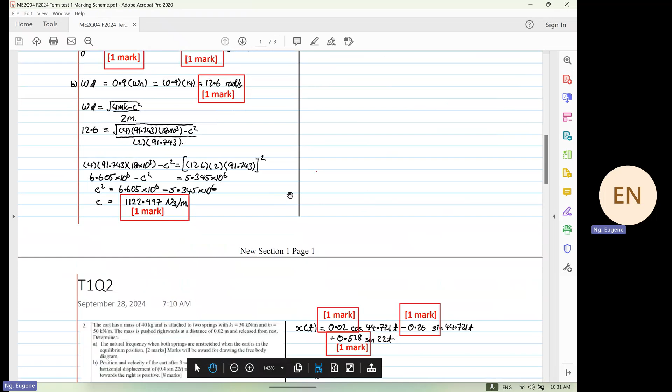So I believe that you have seen the marking scheme. And especially for question number 3, some of you did not calculate two values and the TA did not give you the marks. And I told the TA that as long as your final answer is 2.346, you will get the 2 marks. Are we clear? Okay, so I have a lot of emails coming to me.

Okay, so TAs are very strict. They are not flexible. So most of the time when I see your email coming to me, for question number 3, if your final answer is 2.346, you'll get the full mark. Are we clear? Yes or no? Okay, so don't email me. Email who? Email the TA. And do you know who the TAs are?

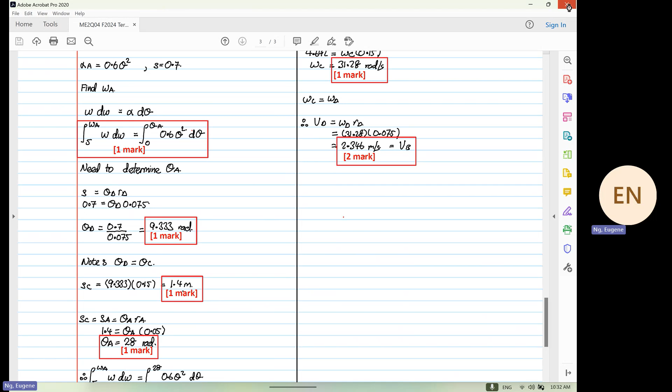Some of you ask me, Eugene, who is my TA? All you need to do is go on to Avenue to Learn, which is on 2Q, and go to the welcome. And on the welcome, these are your TAs. A lot of you know who your TA is, but for some of you that don't, this is how you find your TA. These are the TAs based on your last name. So please contact your TA. If you contact me, I will tell you go to your TA.

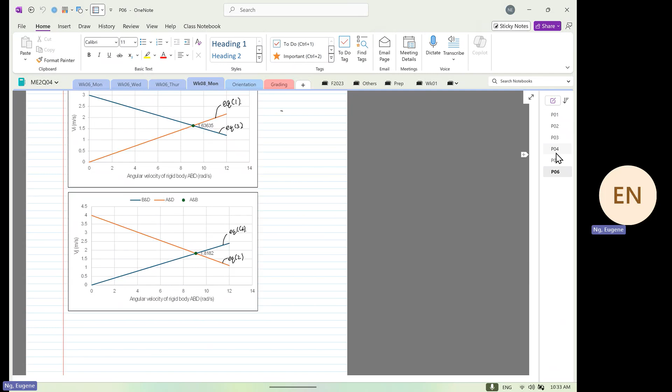Now, I discovered something very interesting, and I think I need to teach this. My colleague in mechanical says no, it's too much for them. I say no, they have to know. So I'm going to look into this problem again. How come I cannot copy the? Bear with me. Let me relaunch.

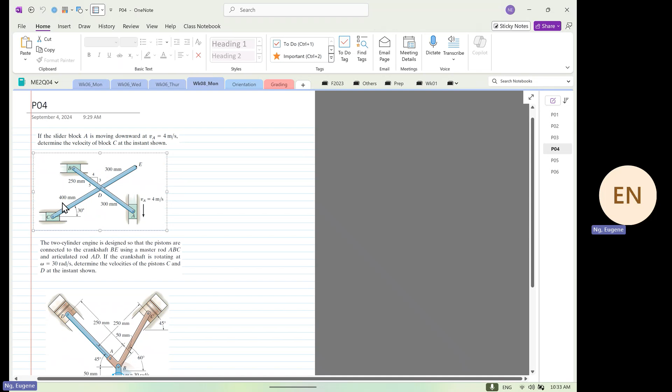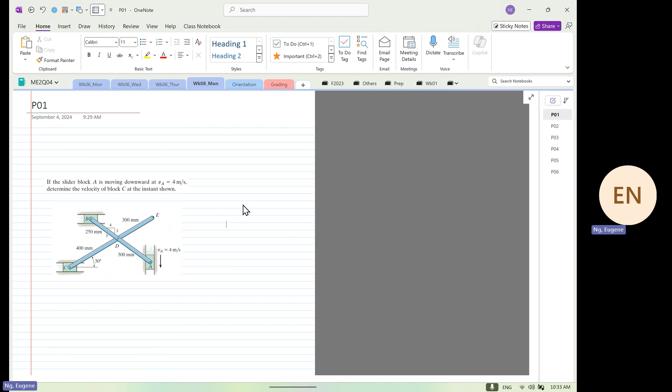I'm going to look at this problem again because there's something that I discovered that I think you have to know, not later when you are in upper years. I think you have to know now. I was talking to one of my colleagues regarding this issue, and he said no, they are still too young to know about this. They're not experienced engineers. No, I think you have to know. So what is this thing that I want you to know?

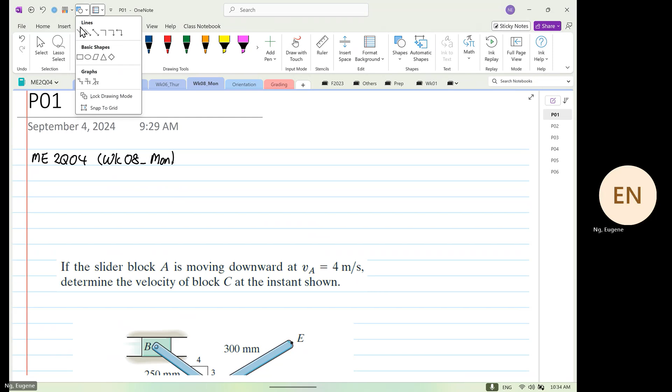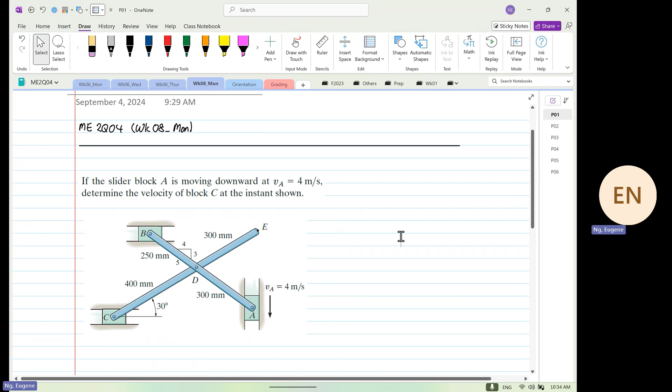We have solved this question before, but there's something important that was not explained properly. Let's recap this problem. We have to find VC. So the equation to use for VC is VC equals VD plus omega CD cross R of C from point D.

In order to solve this equation, we have to determine VD. There are different ways to find VD, but there's only one correct answer. So to determine VD, we have to consider the rigid body ABD.

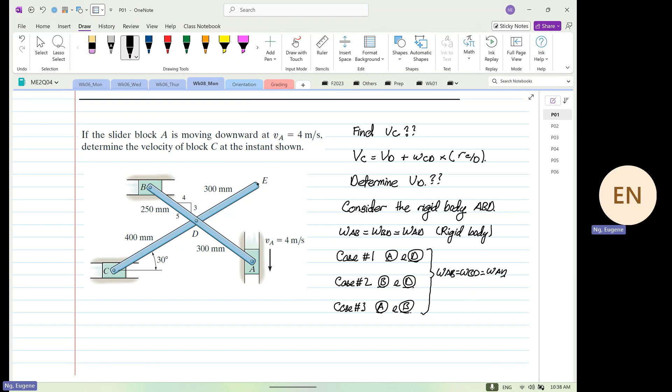Okay. We look at point A and point D. We know over here we have VA is equal to minus 4J. Okay. And then at point D, right, we know that VD is coming down. Sorry, VDJ is coming down.

Right. And we're going to assume VDI is going in this direction, and this is our vector for VD. Okay. So the only thing that we are not sure, this one we assume. Okay, we assume that direction. So we write out VD is equal to VA plus omega AD cross R D from point A.

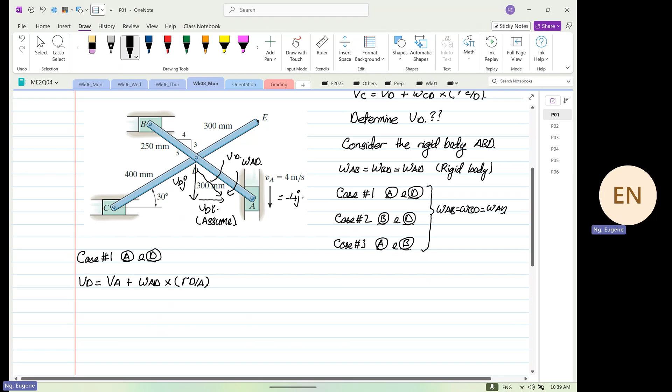Okay. So we know that over here, this is our omega AD direction. That is our omega. So we form this out. We write this is equal to VDI minus VDJ. And the whole thing will be equal to minus 4J, plus minus omega AD K, right? Because we assume it to be in a clockwise direction.

Cross RD from A. So this is point D from point A, minus 0.24I plus 0.18J. Okay. So now we have our I component. Oh, sorry, I cannot do I component first. I need to do the cross multiply first.

So VDI minus VDJ is equal to minus 4J. K cross I is positive, negative, negative is positive, so plus 0.24 omega AD J. K cross J is negative, negative and negative, again, we have a positive, plus 0.18 omega AD I.

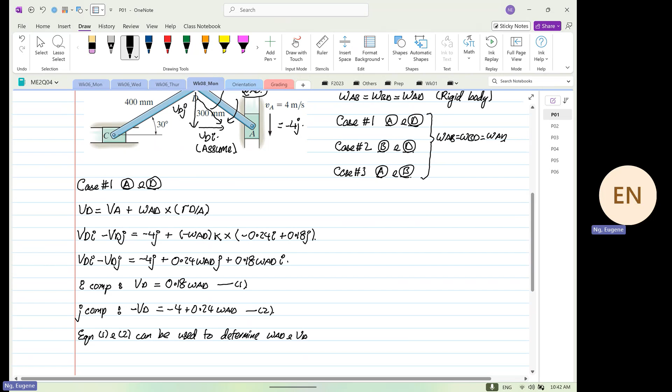I made a mistake on Thursday saying that we cannot use this equation to find VD and omega AD. You could. I repeat again, you can. Okay, so equations 1 and 2 can be used to determine omega AD and VD, right? So when we use this, we have minus 0.18 omega AD is equal to minus 4 plus 0.24 omega AD.

Okay. So if we move things around, we have 0.4 omega AD equal to 4. So from here, omega AD will be equal to 9.524 radians per second. Sorry, 0.42, not 0.4. Rushing again. I need to calm down. Okay, so 4 divided by 0.42, 9.524 radians per second.

And from here, we can find the I component for VD: 0.18 times 9.524 is equal to 1.714 meters per second. And then the J component, we have minus VD equal to minus 4 plus 0.24 times 9.524. So minus VD is equal to minus 1.714 meters per second.

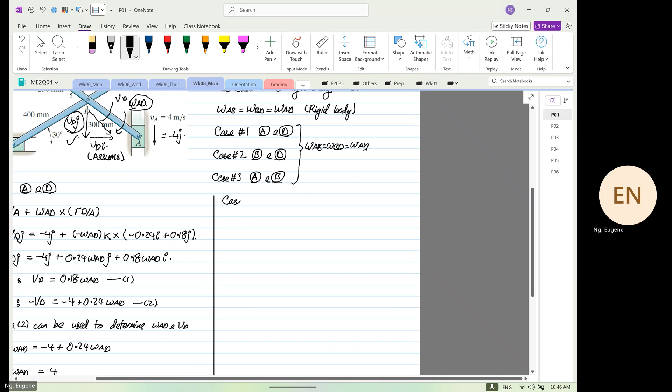You guys are mumbling. Is there any question or point of view that you want to say? Are you okay? Yes. Say it again.

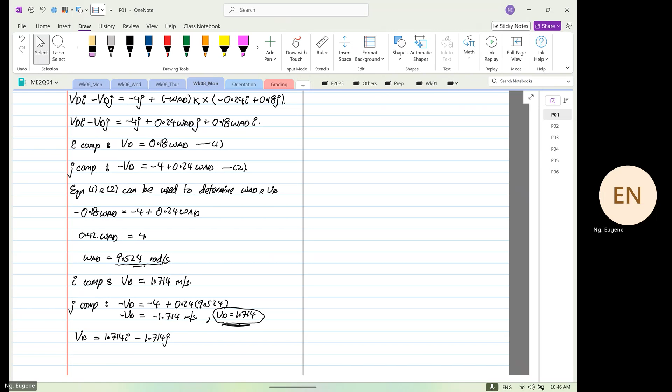VDI. I did not assume them to be the same. VDI is one component, VDJ is another component. They're not the same. Over here,